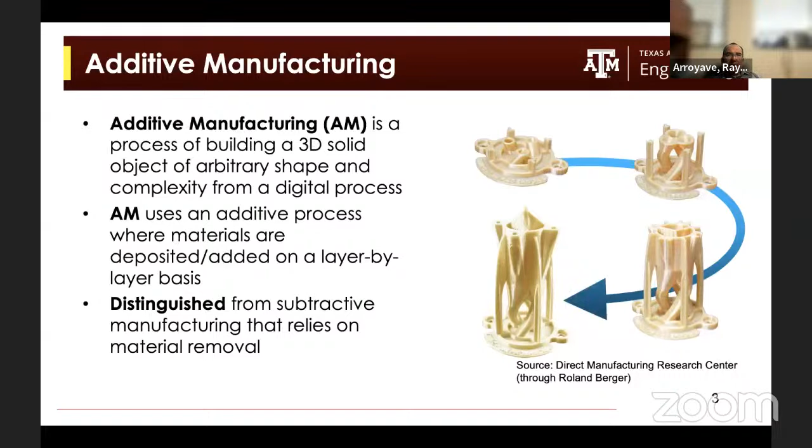This distinguishing aspect of additive manufacturing has become incredibly important in many industries. It started in the 90s, and I remember faculty at MIT, like Professor Sachs, and even my advisor Thomas Eagar, were working on additive manufacturing as a rapid prototyping technology back then. However, in the past decade particularly, it has gained increasing industry relevance and been deployed in a wide range of applications. It's not going to be the only manufacturing technique, but in some applications it may likely be the dominant manufacturing approach in the near future, or now.

Here I'm taking a picture from Roland Berger's report, looking at different types of industries and the manufacturing readiness level scale when it comes to being amenable for additive manufacturing. It turns out that dental applications have all kinds of additive manufacturing technologies. Tooling is important, aerospace, and so on.

It tends to be that additive manufacturing is more economically feasible and attractive whenever the part you're making is both geometrically complex, so you cannot manufacture it any other way, and you're actually making things that have high value. So in any industry where you have a high value proposition and the thing you're trying to manufacture is complex, additive manufacturing may play a role.

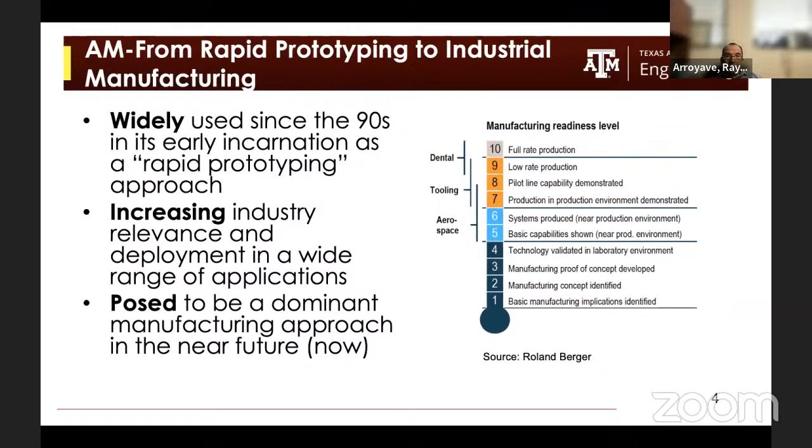Now, there are many benefits to additive manufacturing. For example, because you're building materials or components on a layer-by-layer basis, you have considerable freedom in terms of the geometry and topology of the part you're making. So it gives freedom to do really optimal design for whatever application you have in mind.

Because you're 3D printing complex geometries, you can consolidate a lot of parts. There are examples already deployed in industry where a part that used to consist of 15, 20 components is turned into a single part through additive manufacturing. This has a lot of benefit because your inventories become simpler, your supply chain becomes easier to manage, and the provenance and verification of your components is easier to handle.

Another advantage is the fact that you can customize your fabrication. After all, you're designing stuff and you can print components and parts on an individual basis. That means you can design components specifically for the application you have in mind, and basically mass customize your fabrication.

Another advantage of additive manufacturing is that you can significantly save the amount of material you need to begin with to fabricate a part. This is important because in subtractive manufacturing, we start with a block of material and sculpt away material to get the shape we want. Here, we're building the shape from the ground up.

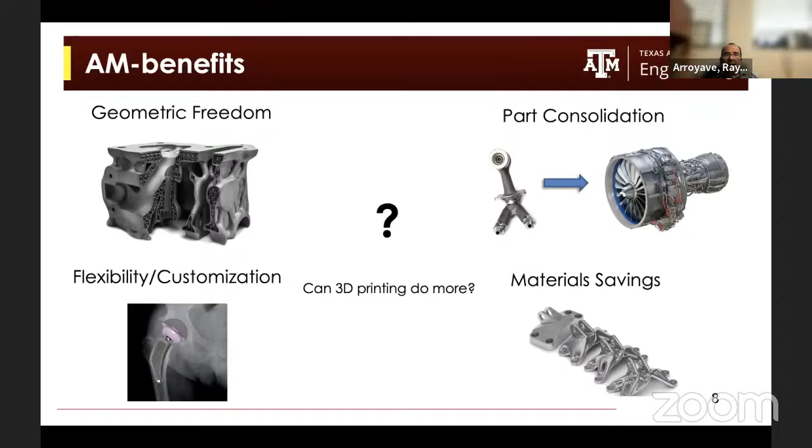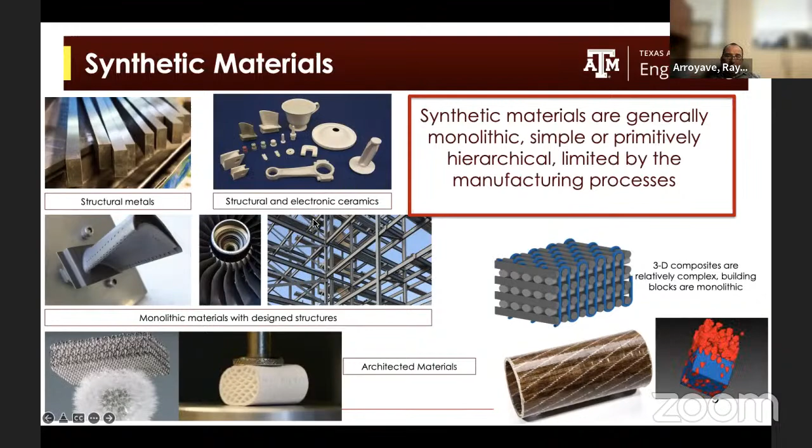Now, the question here is: can 3D printing do more than just allow you to create geometrically complex, consolidated, customized, mass-efficient parts? To take some inspiration, if we look at synthetic materials, they tend to be monolithic, simple, primitively hierarchical, and extremely limited by the manufacturing process. So the stock used to fabricate complex parts has to be very simple in geometry, composition is uniform, and there's not a lot of freedom in terms of the design you can use.

Natural materials, on the other hand, tend to be very complex. You have hierarchical structures, and more importantly, in natural materials you actually have location specificity. What does that mean? Every location of a biological structure may actually have specific hierarchical arrangements that are tailored for a particular function.

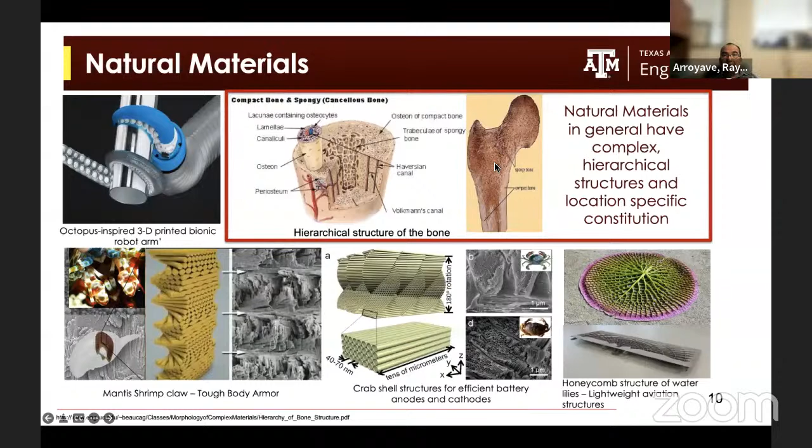So every component in a biological material may have different microstructure and different chemical makeup, which gives them different properties that are especially adapted for the particular function that object has to have. For example, in the case of bone, different parts of the bone are going to have different stiffness, strength, and mechanical properties depending on the loading conditions and function that bone has in an animal body.

So the current value proposition of additive manufacturing is based on the fact that you can build highly customizable and complex shapes that make the design of the component more efficient. And yet, we believe that the underlying 3D printing technologies can be leveraged to achieve much more.

So the question here is, how can we leverage the fact that we can build materials on a layer by layer, and in some cases voxel by voxel basis, and use this flexibility of fabricating materials from the bottom up to enable things that otherwise would be absolutely impossible to do with traditional technologies?

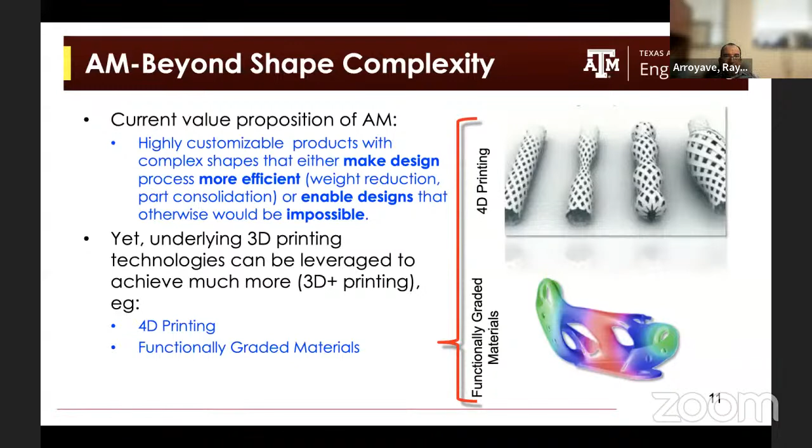In this particular talk, I'm going to focus on 4D printing and functionally graded materials. I'll start with 4D printing. I believe the first example of 4D printing started at MIT about 10 years ago. 4D printing denotes additively manufactured structures that can change their form, property, or function with time under stimuli, which could be light, a change in pH, temperature, magnetic field, or stress. 4D printing expands the potential of 3D printing by providing more degrees of freedom to engineering design.

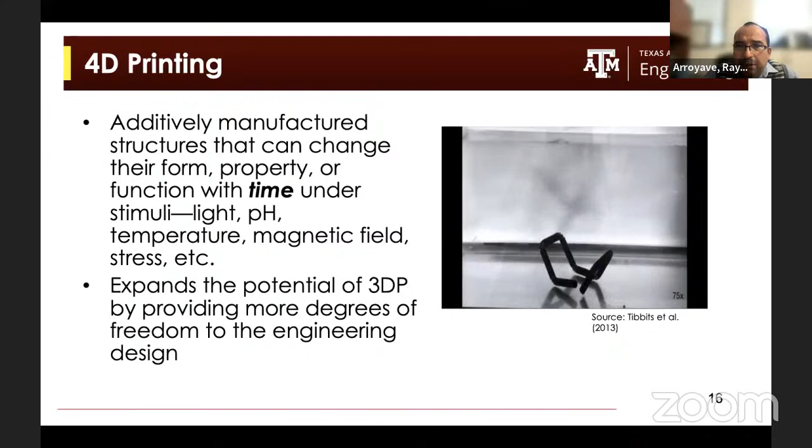Here's an example that I believe came out of MIT: a polymer engineered so that different elements of this polymer component responded differently to the local chemical environment. I don't know if in this case it was a pH-responsive material, but because different components were engineered with different sensitivity to the surrounding chemical environment, you could enable, for example, self-assembly or time-dependent actuation or motion in the part they were making.

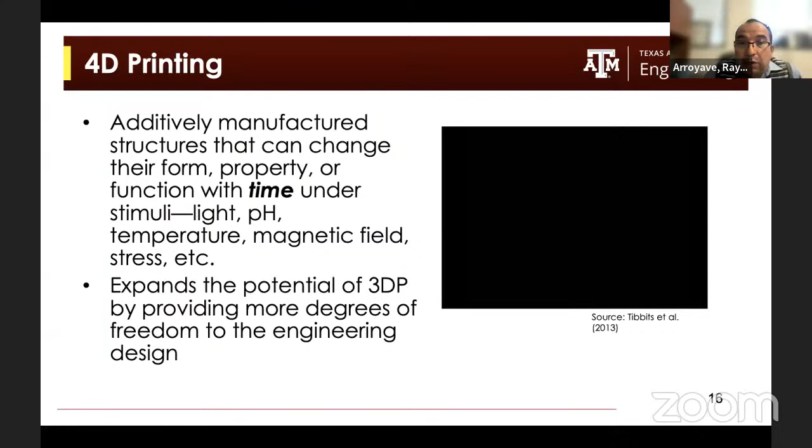So this was in polymers. And actually, to date, 4D printing has mostly exploited stimulus-responsive soft materials. 4D printing is extremely advanced in the case of soft materials, and they've been used to demonstrate a number of applications important for a wide range of industries. There are many types of soft stimulus-responsive materials that have different mechanisms by which they respond over time under the presence of a stimulus.

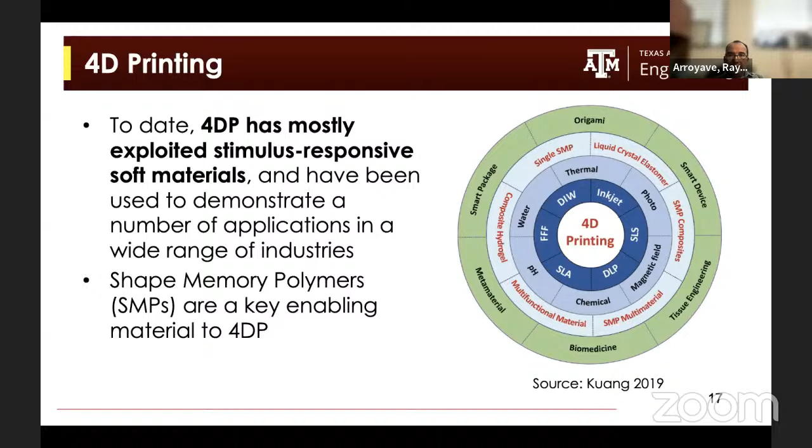Now the question here is, what about metals? It turns out that shape memory polymers have a counterpart that is probably older than shape memory polymers: shape memory alloys. These materials are metallic systems capable of undergoing very large recoverable strain as a result of reversible martensitic transformations.

So you have martensite at low temperatures, for example, and as you increase temperature, there is a rapid martensitic-style transformation that takes this crystal structure and transforms it into a higher symmetry structure. In shape memory alloys, this martensitic transformation is actually reversible and can be triggered by stress, temperature, magnetic field, or a combination of these different stimuli. So shape memory alloys can undergo these reversible phase transformations.

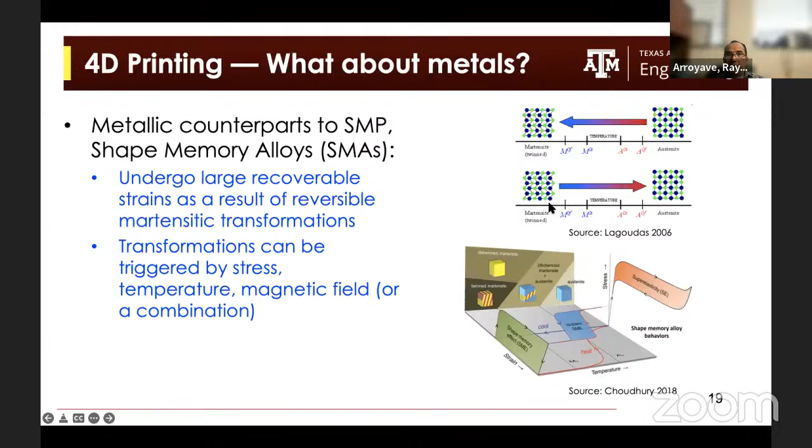It turns out that shape memory alloys have some advantages relative to shape memory polymers, in the sense that they can withstand loads that are orders of magnitude more than what a soft shape memory polymer can withstand. So you're talking about 200, 300, even higher loads, while undergoing these reversible phase transitions. And they enable applications that are not possible with soft materials.

For example, if you want actuation at high temperatures, you're probably not going to be able to do it with shape memory polymers. There are examples of shape memory alloys, including alloys discovered at Texas A&M by Professor Karaman, that can undergo these reversible phase transformations at temperatures as high as 800 degrees Celsius. So clearly, as soon as you reach temperatures of 200 and above, having to carry loads of hundreds of megapascals, these are operating conditions that soft shape memory polymers cannot sustain.

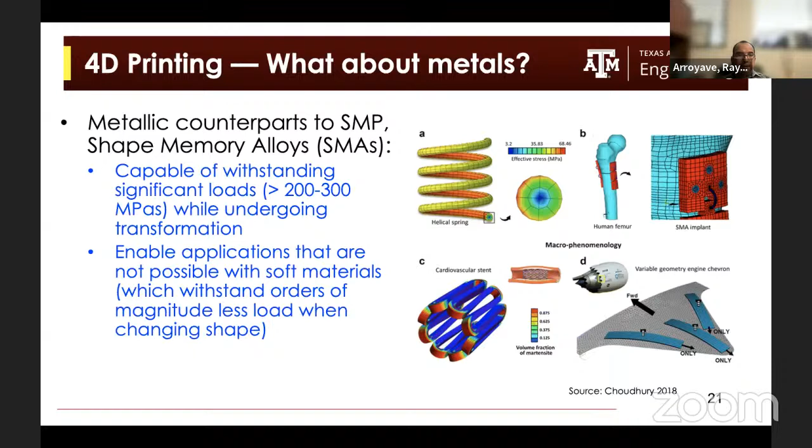So there is clearly an opportunity to try to do something related to 4D printing with shape memory alloys. Now, one interesting aspect of shape memory alloys is that they are extremely sensitive to minute changes in the chemistry and the microstructure.

Here, for example, I have a plot for the transformation behavior—basically the transformation temperature at which this reversible transformation is triggered for nickel titanium, as a function of the amount of nickel. If you look at this change, you can shift the transformation temperature by almost 100 degrees Kelvin by changing the chemistry by just less than 1 atomic percent.

More importantly, in addition to this, we have discovered in collaboration with Professor Karaman that if you subject some of these shape memory alloys to heat treatments, you can dramatically change the transformation behavior by controlling the microstructure of the material. So these materials are incredibly sensitive to chemistry and microstructure.

So a key insight that we had in our group, about 4 years ago, was that if we could locally change the chemistry and/or microstructure of these materials, we could achieve location-specific behavior. And this could be enabled through the local control of the additive manufacturing process conditions.

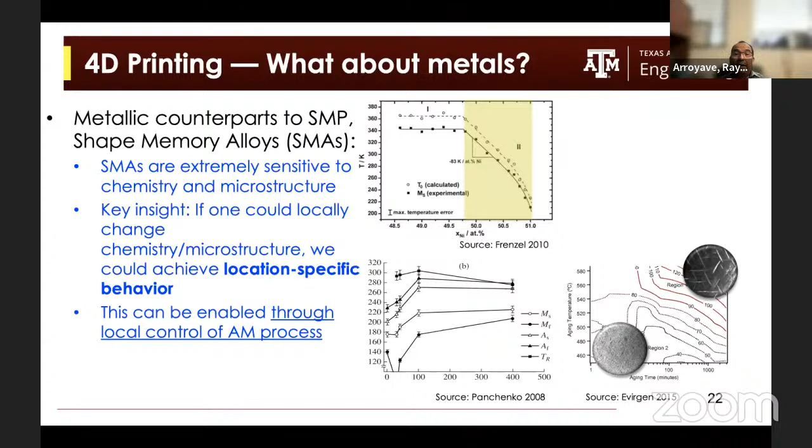So the idea here is, if we know that these materials are highly sensitive to chemistry and microstructure, can we tailor the chemistry and microstructure of a material that has a uniform feedstock composition, just by locally controlling the process conditions? So we're actually proposing here 4D plus printing, where we have the traditional 4D printing characteristics of being able to fabricate things that respond in time.

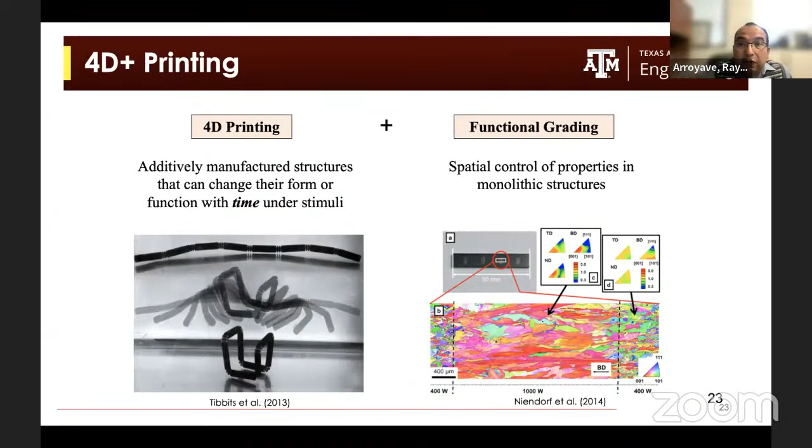But the idea here is that we actually want to locally change the composition, so we control this actuation in time and also in space. Can we actually print different locations of the part with different processing conditions? So every region of the part has different chemistry, and therefore different transformation behavior when we apply a particular type of stimulus, okay?

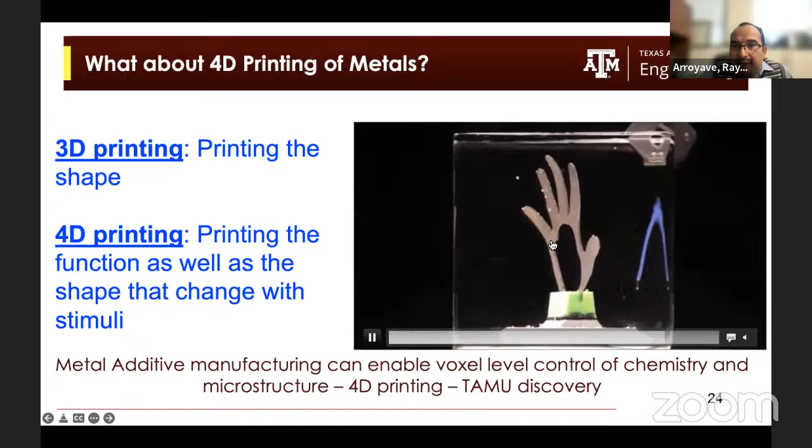This is not water, this is actually glycerin. It turns out that if we try to do this with water, we will see a lot of boiling and a lot of bubbles, so we wouldn't get a nice picture. So we basically had to figure out what type of liquid to use, and we settled on glycerin to try to visualize this actuation response with minimal visual disruption. And of course, this is an accelerated video.

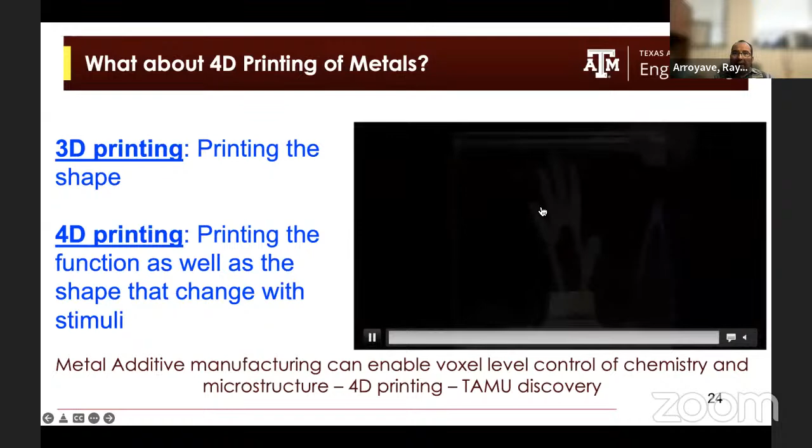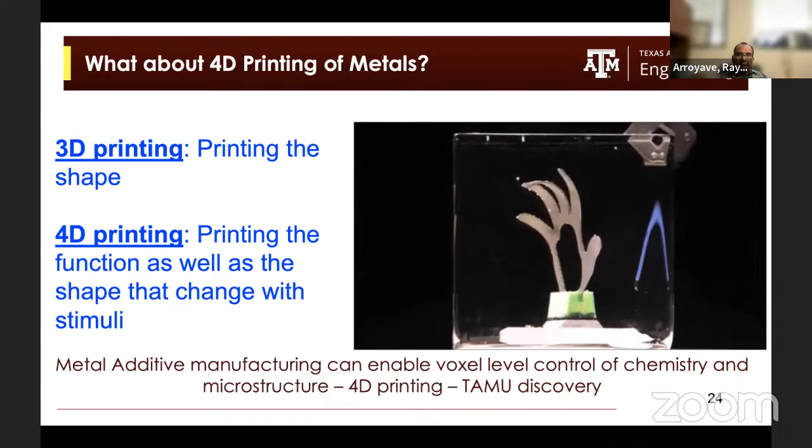It turns out that the actuation, at least in this case, was not really fast. So this is not like a scary robotic hand, it's actually kind of slow. But here we are demonstrating that we could potentially control, on a location-by-location basis, the response of these materials.

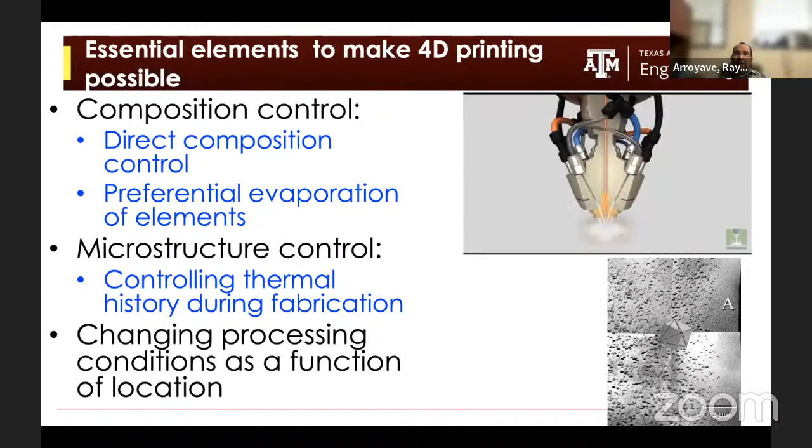So essential elements to make 4D printing possible in the context of additive manufacturing is through composition control. Can we actually directly deposit feedstock that has different chemistries? There are 3D printing technologies, for example, that allow you to do multi-material printing. I'm going to talk about that in the second half of my talk.

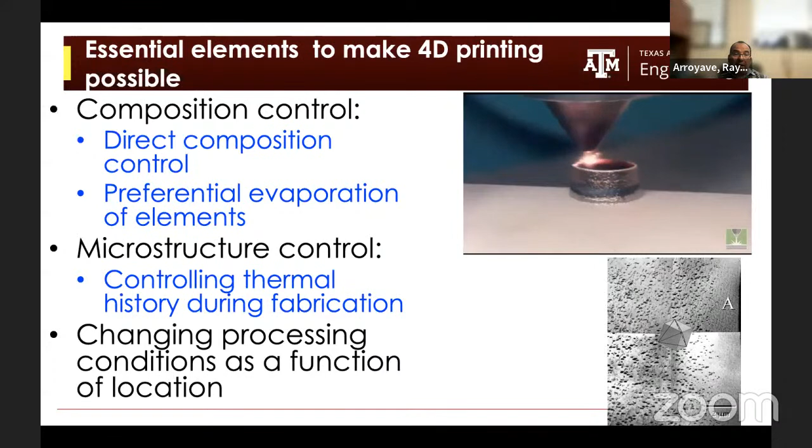Or, in the case of a material like a shape memory alloy that is extremely sensitive to chemistry changes, could we actually exploit the fact that different elements in the alloy have very different vapor pressures, to then enable the preferential evaporation of elements in such a way that we could locally control the chemistry?

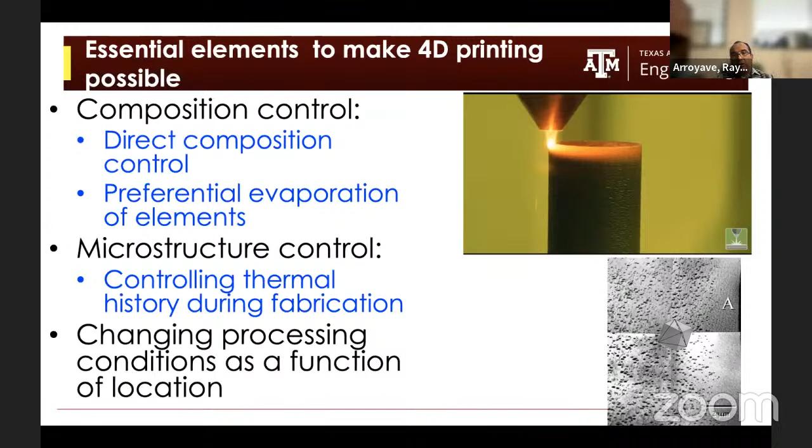And of course, in addition to composition control, we could do microstructure control, and this could be enabled, for example, by controlling the thermal history of the material during fabrication. So the key idea is to change processing conditions as a function of location in the part.

By the way, we have demonstrated what is possible, but we haven't yet developed a whole framework that allows us to solve the inverse problem. It turns out the inverse problem is very hard. We have just tinkered with the material and process conditions to demonstrate that location specificity is possible in the context of 3D printing of shape memory alloys.

But if you think about it, in order to enable this in an algorithmic way, you actually have to combine topology optimization, model process and structure property relationships in additive manufacturing, optimize the process, validate and verify, and make sure your optimization is robust against changes in the local cooling conditions when you fabricate. So right now I'm just going to talk about some steps we have taken in this direction, but we don't have yet a complete story to tell.

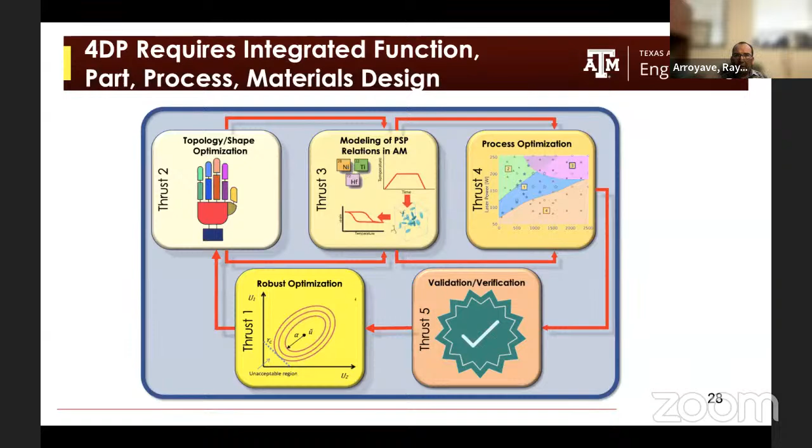On the process optimization side, we have used a combination of physics-based models, machine learning, and experiments to try to come up with a framework that enables us to find optimal regions in the processing space that lead to parts with low porosity. The first thing is, if you're trying to fabricate something with additive manufacturing, the least you can do is make sure that whatever you print doesn't have macroscopic porosity that would ultimately compromise the performance of the part. Pores lead to failure, such as fatigue, etc.

So the first thing we do is say, well, we have this large processing space, we can change the power and the scan speed of the laser. Can we detect what regions in the processing space lead to optimal printing without defects? The idea is we do some simulations, compute an initial printability map, do some single track experiments, calibrate the models to correct for missing physics, revise the printability map, and then in the good region, where we do not expect microscopic defects, we print bulk samples.

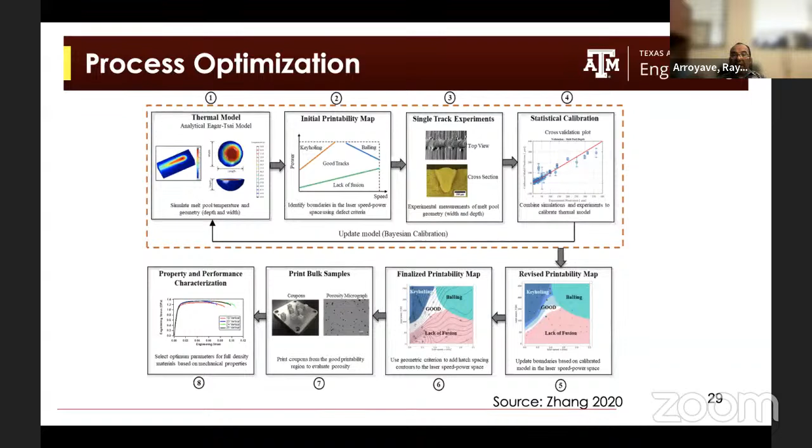What we have found is that as long as we print things in regions not conducive to these microscopic defects, the properties we get out of these materials tend to be very uniform. And that makes sense, right? We want the material to not be limited by the presence of microscopic defects such as porosity.

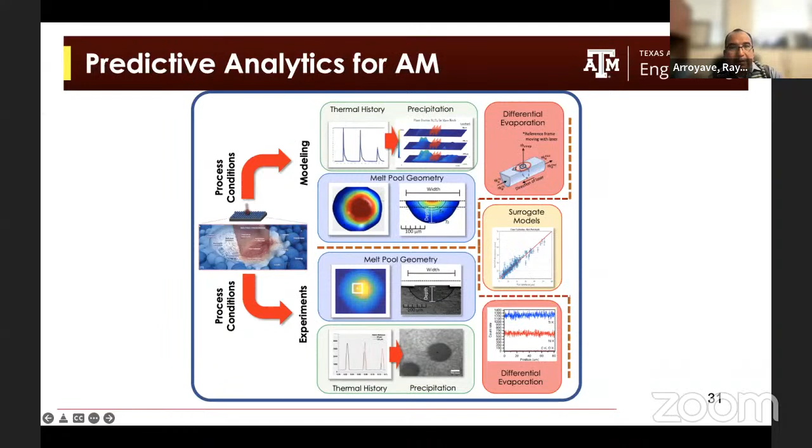Now that we know how to print the material without defects, the question is: can we actually use computational models to predict the effect of local thermal history on the chemistry and/or microstructure of the material? The idea is, can we build physics-based models, and couple them with experimental twins to build robust models that enable prediction of the change in chemistry as a function of changes in process conditions?

So we have one first step in this direction, and actually one student who was a lab mate of Kubra for a few years, Dr. Milad Ranayefar, just defended his thesis a couple of weeks ago.

He developed a modeling framework where he was able to connect a thermal model, initially developed by Air Force Research Lab and calibrated against experiments, to a model that predicted the differential evaporation of nickel in nickel titanium shape memory alloys. So we would basically predict how much nickel loss existed in a melt pool. Then he built a multi-layer model that integrated these single track predictions and took into account the mixing of chemistries as you build successive layers. He was able to demonstrate that, at the end, he had a computational framework that was in very good agreement with experiments.

Here is a prediction comparing the experimental nickel loss, measured via the transformation temperature of these shape memory alloys, with computational predictions. The agreement of 0.15 atomic percent error is actually smaller than the resolution of chemical analytical techniques such as EDS or WDS. So we're able to build predictive models more precise than some analytical techniques for measuring the local composition of materials as they are printed.

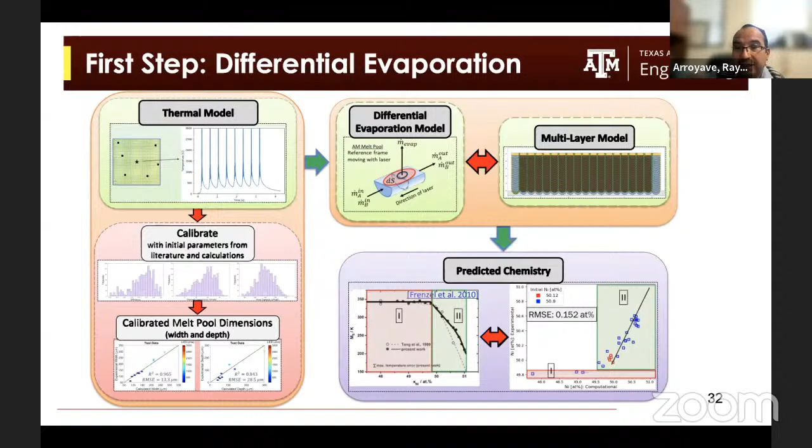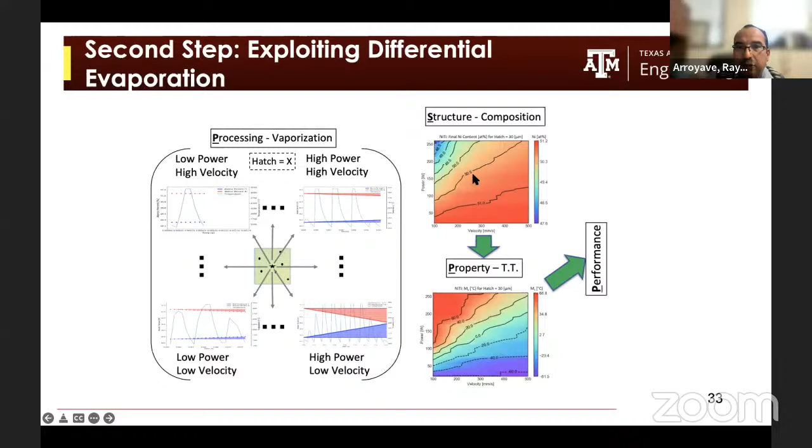Once we build this model, we can create process maps that tell you how the nickel content and transformation temperature will change as a function of where you are in the power-scan speed space. Once we have this forward model, the idea is to start thinking about how we invert these forward models to begin closed-loop design.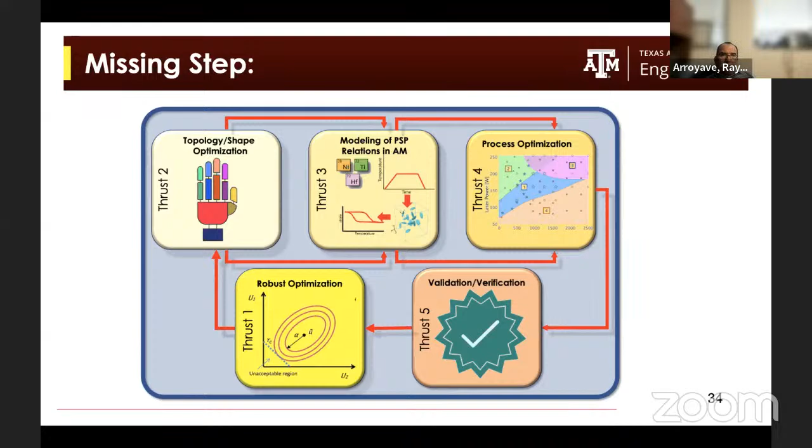This is objective-based algorithmic design for 4D printing. We're not quite there yet—we're starting to work on the inverse problem, but don't have a lot of results yet. Milad has some preliminary work that's exciting, but this is a very interdisciplinary project requiring more people than we currently have. Still, I think there's interesting future potential for 4D printing.

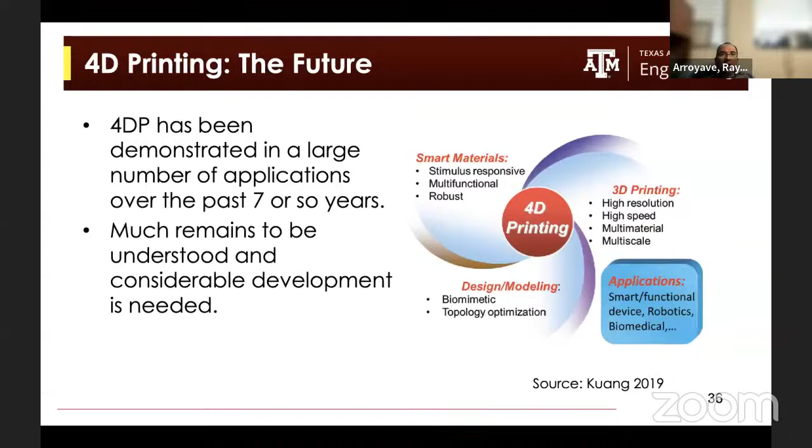4D printing has clearly been demonstrated as a very attractive area in the case of soft responsive materials. We think there's a lot of really cool stuff that can be done in the context of metallic responsive materials. This is an area that, in collaboration with Professor Karaman and Elwany, my group wants to explore in the future.

Now I'm going to switch gears and talk about another example of going beyond 3D printing: functionally graded materials.

Here, what we're trying to do is expand the design palette. Compositionally graded alloys are promising, particularly because they enable new possibilities in part design. Instead of doing topology optimization on a part to minimize total weight, imagine if you could print different properties in different locations of the part, so every location could be optimally designed for a particular performance characteristic.

For example, if you're 3D printing a turbine blade, maybe you want the surface to be oxidation resistant, but maximize creep strength or high-temperature strength in the core. In some cases you can't have an oxidation-resistant alloy that's also creep resistant, ductile, and has good high-temperature properties all in the same monolithic material—because to do that you'd have to over-design and create alloys that are good at everything, which isn't always attractive.

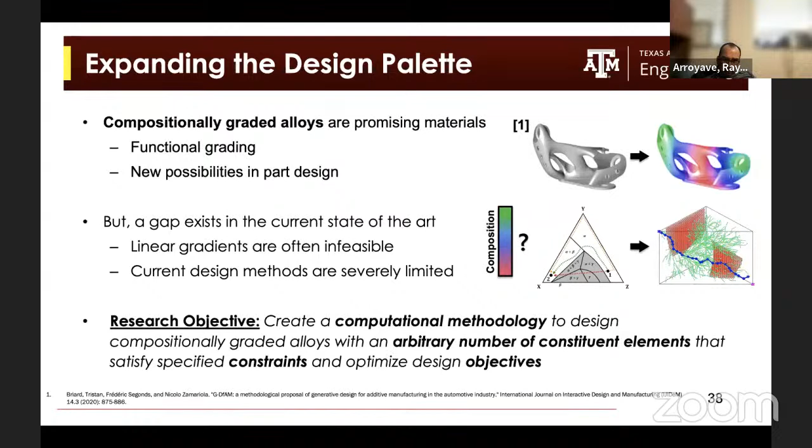So the idea is: can we enable more flexible designs using the capabilities of 3D printing, particularly by exploiting multi-material printing to locally change the chemistry, microstructure, and properties of the part to locally optimize performance for practical applications? Even though this is possible, there are gaps—linear gradients are often infeasible, which I'll explain shortly, and we lack design frameworks that take advantage of these capabilities systematically. Our research objective is to create a computational methodology to design compositionally graded alloys with an arbitrary number of constituent elements that satisfy specific constraints while optimizing design objectives.

So how do we do this in practice? There are many techniques for multi-material printing, but in our work we've used directed energy deposition. Here you print material layer by layer, but unlike typical additive manufacturing, we deposit the material and energy at the same time—shooting a beam of powder and melting it on the fly, hoping it sticks to the substrate so we can build a complex three-dimensional shape layer by layer. There are many possible engineering applications, and this can enable multi-material design.

I will not touch this topic of multi-material design because I don't have enough time, but in principle, what compositionally graded alloys can enable is the local optimal design of material compositions in different parts or regions of the part that we're trying to print. And then using the techniques I'm going to show in a minute, we can stitch together these multi-materials in such a way that they form a monolithic part.

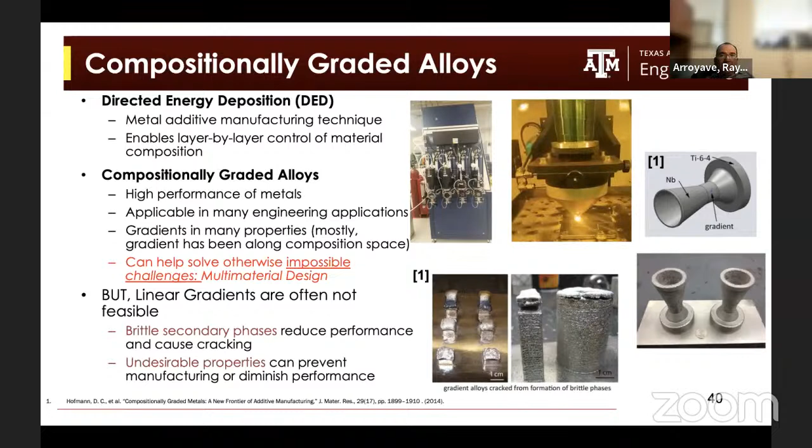Unfortunately, when you try to do this compositional grading with linear gradients that just connect one start composition to an end composition, it turns out that brittle phases appear, and oftentimes linear gradients lead to undesirable properties that can compromise the manufacturing of the part and diminish their performance.

So it turns out that compositionally graded alloys are challenging to print. There are many examples in the literature where people have tried to print linear gradients from all kinds of base alloys, from steel to Inconel, from steel to titanium 6-4, and so on. It turns out that 90% of the time, these linear paths fail because you form brittle phases that end up compromising the mechanical integrity of the part.

They can also, if you do a linear path, create property discontinuities, for example in thermal expansion coefficient, that would compromise the mechanical performance of the part because you can generate internal stresses or other undesirable conditions inside the part that would compromise its performance.

So there have been some attempts to use computational tools to design these alloys. Most of the time what people have done is try to predict ternary phase diagrams and then find, by human intuition, a path that may run around obstacles. But the problem is that when people use these approaches, they are extremely difficult to scale and very difficult to deploy in the case of multi-component materials.

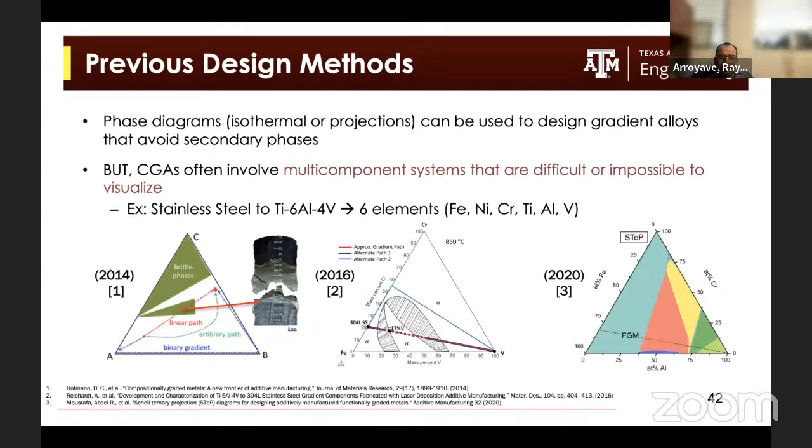Why? Because humans are not built to see things in more than 3 dimensions. So when you have many more dimensions in your design problem, it is extremely difficult to come up with robust composition paths. So what we have done in our group, in collaboration with Professor Malak, is to look at the gradient design problem as that of motion planning.

We're actually trying to say, well, can we formulate the design of a gradient alloy as a path planning problem? For decades, a lot of engineers in a lot of fields have tried to develop algorithms that enable the design or planning of a path. These types of techniques have been used in many problems, from protein folding to mapping trajectories in autonomous vehicles and so on.

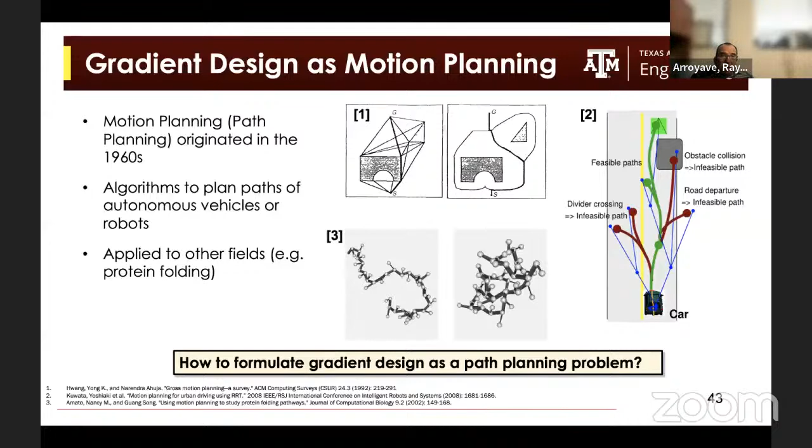So the question we have is, could we actually leverage these path planning technologies and transform them in such a way that we can use gradient compositional design in an algorithmic way?

So basically what we do is try to minimize a particular function, and this function could be a property, or the length of the path, or some other quantity, subject to the fact that you start and end at a particular point in the chemical space, and subject to constraints related to avoiding regions in the chemical space that are undesirable, maybe because some phases form that are undesirable, or because some regions have a low melting point or some other undesirable characteristic.

So can we actually map a trajectory in an n-dimensional space, maximizing or minimizing a quantity while avoiding obstacles?

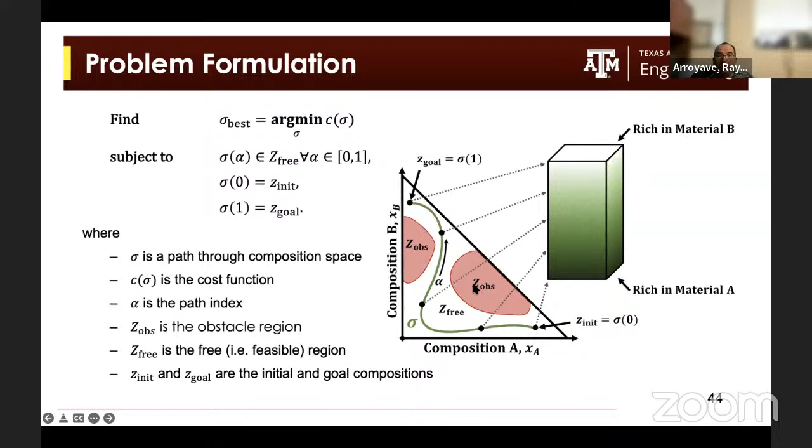So this is the methodology. We use computational tools, computational thermodynamic tools, to map the obstacle space. Then we use machine learning methods to classify the regions in the space that are unfeasible. With these classifiers, we build an obstacle model, and then we present this obstacle model to a path planning algorithm, such as RRT*, that enables us to connect points in chemical space in such a way that we avoid obstacles, and at the same time minimize or maximize a particular property.

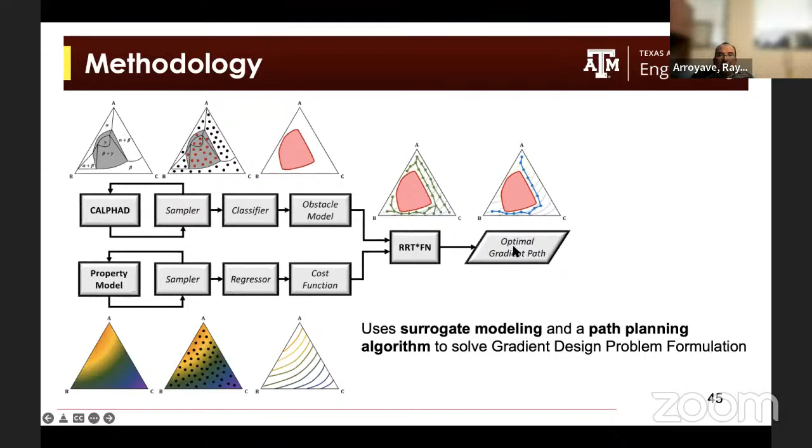And of course, in addition to the phase characteristics, if we have a property model, we could build arbitrarily complex cost functions into the path planning algorithm in order to obtain some measure of optimality in the gradient that we're fabricating.

So we have some experimental results. This is an example that was published a few years ago, where we tried a naive linear path between a particular alloy and stainless steel.

And of course, what we found when we tried this path is that the sigma phase, which is really bad in steel alloys, is prevalent for much of the path. And when you try to print this naive path, you actually get cracks because of the formation of these very brittle phases.

On the other hand, when we plan the path, this is an early example, we're way better, and we can actually match almost perfectly the planned trajectory. But this was one of the earliest examples where we design a path and then try to approximate it with our multi-material printer.

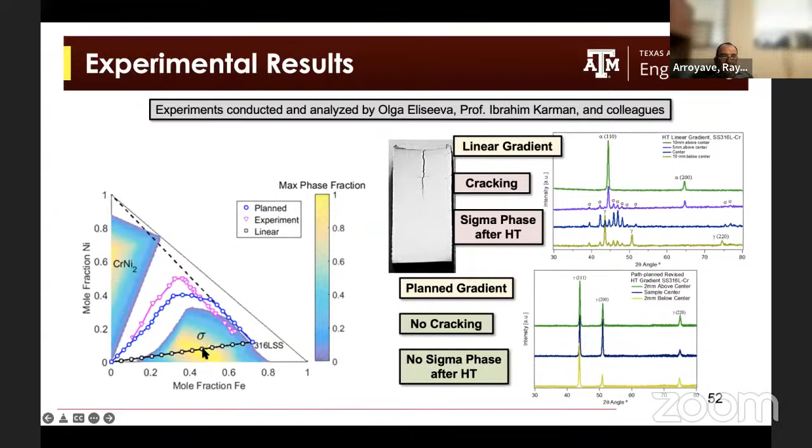We were able to see a compositionally graded path that had no cracking, and we didn't observe any sigma phase even after heat treatment under temperature conditions where the sigma phase would be observed if you actually had a composition in this region.

So we have demonstrated that we're able to optimize a path by avoiding obstacles. But what about functionally grading? What we have presented is just compositionally grading, but functionally grading is about grading not the composition, but actually a property or a function. And this has many applications.

For example, large discontinuities in the thermal expansion coefficient could lead to significant stress concentrations. So a property profile that is smooth may actually minimize these changes, and therefore the stresses that are built up when the material is subject to temperature changes.

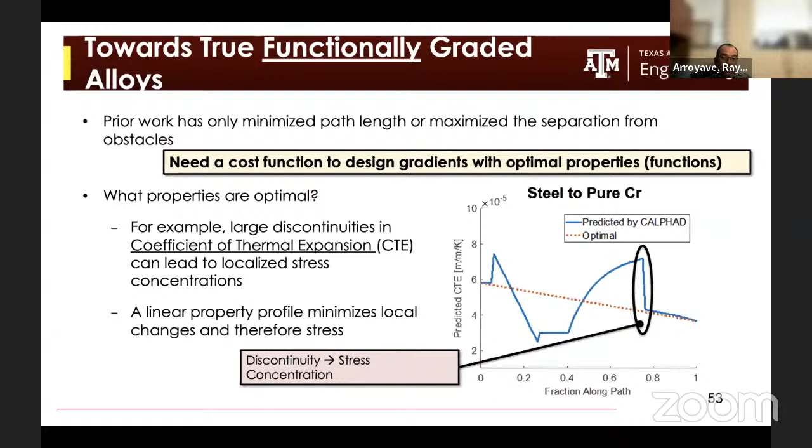And that is just one example. We could actually grade on purpose other types of properties, such as strength, or elastic modulus, or other types of properties for different applications.

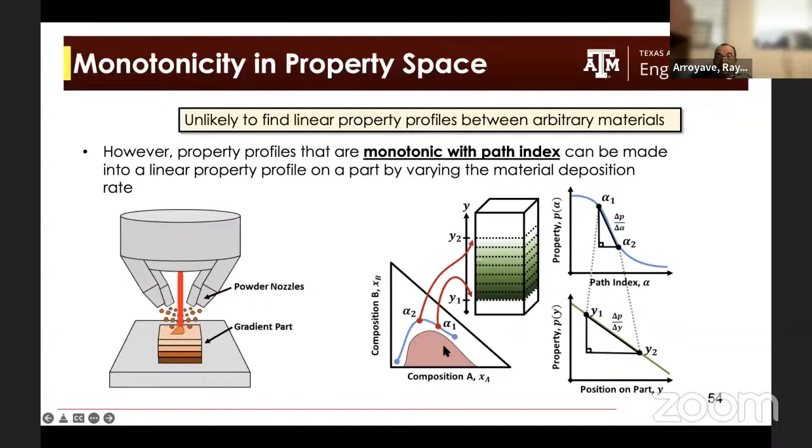What we know is that it is unlikely to find these linear property profiles between arbitrary compositions. However, one thing that my former student Tanner Kirk discovered was that if we ensure that the path in the composition space was monotonic in the property space, that is, if we ensure that the trajectory changed the properties only in one direction, so it always went down or up, we could then create any arbitrary linear or nonlinear profile of this property just by controlling the deposition rate.

So the idea here is we actually have to find a path that is monotonic. Then once we find the path that is monotonic, we can write any arbitrary property profile as long as it's bounded by the limits in the property between our start and end goal for the composition trajectory. So to make any gradient part with optimal properties and arbitrary property profiles, the only thing we need is to find a gradient path with this monotonicity behavior.

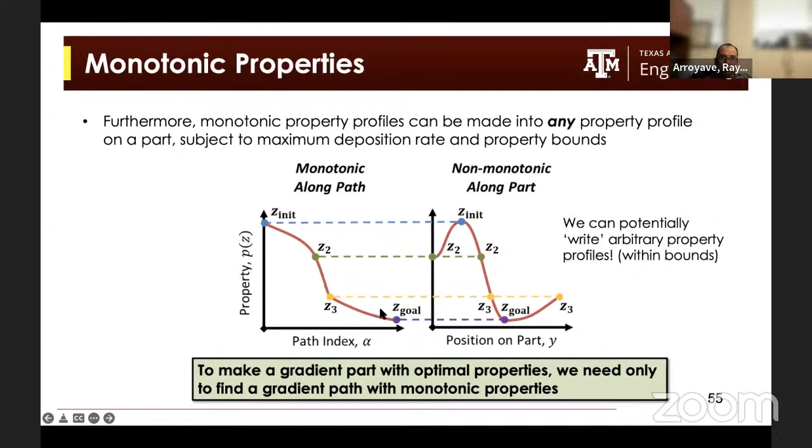So this is an example. We looked at the iron, cobalt, chromium system, and we tried to map a path that connected two different compositions. We found an optimization problem where we tried to minimize the length of this trajectory while ensuring that we didn't have a particular phase, that we avoided obstacles, and at the same time made sure that the path was monotonic in thermal expansion coefficient.

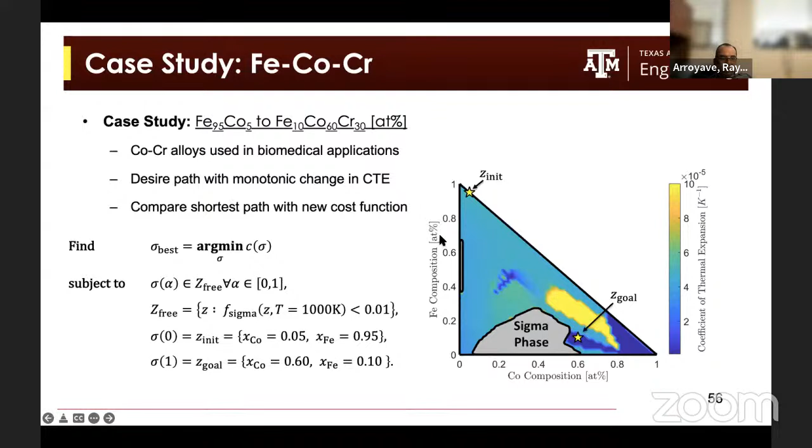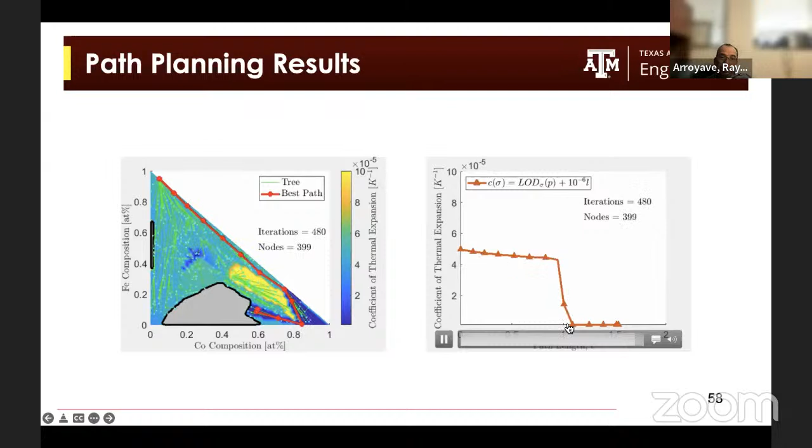When we apply the path planning and enforce the monotonicity constraint, we find that the algorithm is able to find a more complex and longer path, but in this case the property is monotonic. And if it's monotonic, that means that just by controlling the deposition rate, we can print any property profile we see fit. This is just an example comparing the monotonic and non-monotonic path, and clearly this path is likely to have fewer problems with thermal expansion stress buildup than the non-monotonic case.

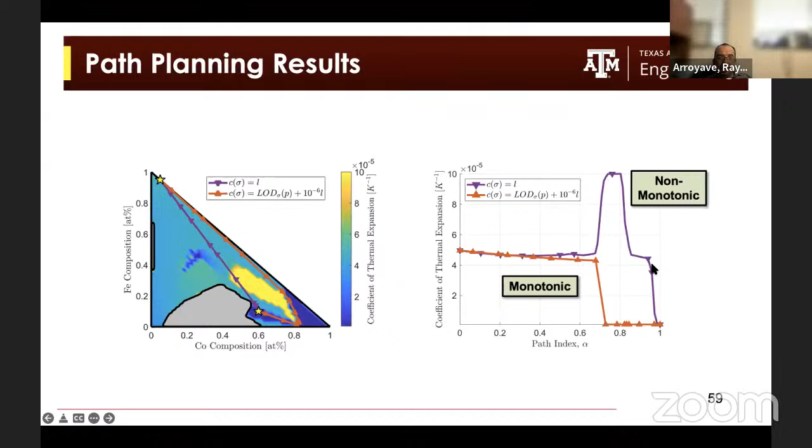So future work in this context of functionally grading: we have done compositionally grading, but if we're trying to print this, we have to map the processing space in such a way that we minimize the formation of microscopic defects. The idea is to combine composition path planning with process path planning so that we obtain not only optimal chemistries, but also optimal processing conditions at every material point, optimizing a particular property while avoiding undesirable obstacles, while ensuring that the composition path is printable.

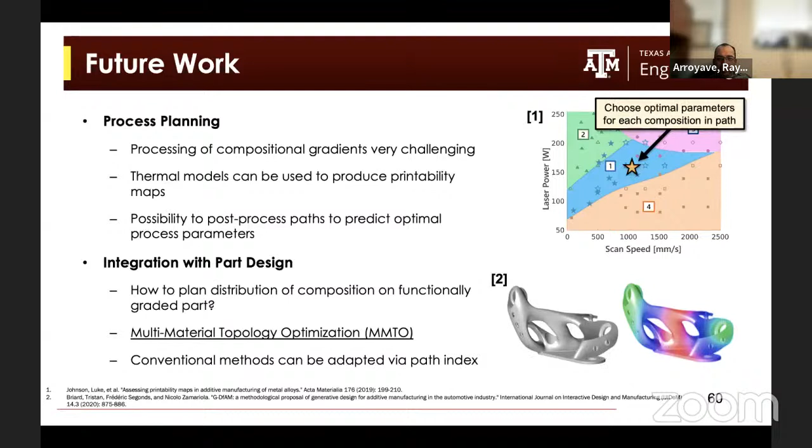And of course, the other thing that we want to do is integrate this with part design. So can we exploit technologies such as multi-material topology optimization in such a way that we can locally optimize the chemistry and properties of the part as we 3D print it? This is one of the future ideas we have for this research program.

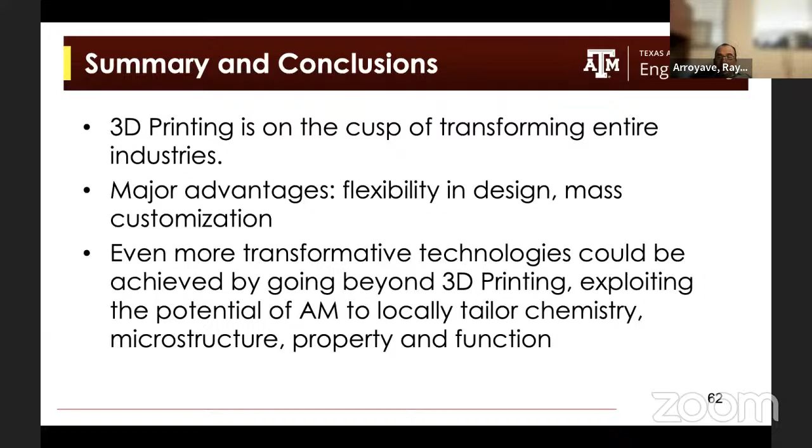Okay, now to conclude, I'm a bit longer than I expected. 3D printing is on the cusp of transforming entire industries. As we have seen in this talk, the major advantages are flexibility in design, mass customization, and more efficient utilization of materials. But we believe that even more transformative technologies could be achieved by going beyond 3D printing, exploiting the potential of additive manufacturing to locally tailor chemistry, microstructure, property, and function.

And with that, I would like to thank you for your attention, and I will be happy to entertain questions that you may have. Thank you.

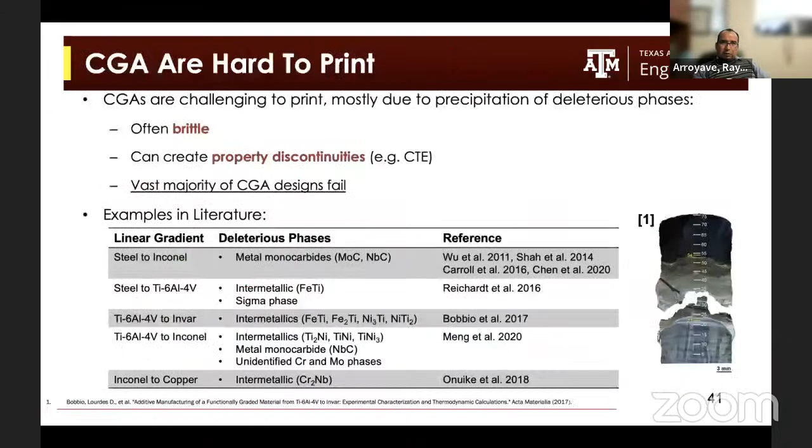But we haven't incorporated it yet in the road mapping idea. Actually, the road mapping idea is just an idea. We haven't even written a single paper. My student is working on the first paper where he demonstrates this idea, but we haven't done much yet. Okay, but yes, you're right.

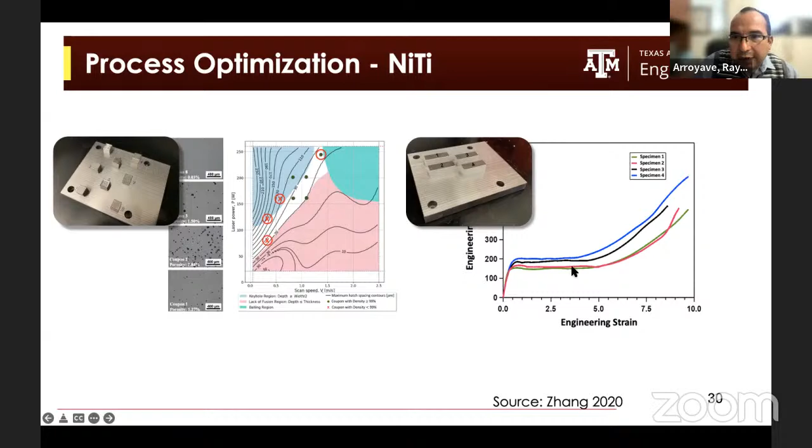Thanks so much, and I have actually one really quick more thing, Professor. Sure. As a heads up, when looking at those little density cube builds that you showed, I noticed you seem to have them oriented such that the recoater blade's going to hit parallel to some of the long faces of the specimens. If you rotate them a couple of degrees, it'll make it so you could potentially have less issues in terms of porosity, because the recoater blade, instead of hitting a whole lot of solid edges at the same time... the material tends to kind of edge.

Yeah, rotate them a couple degrees. Yeah, so thank you for that, Matt. I'll let... so I don't do the printing. My colleague Alaa Elwany has the printers. But yes, I will discuss that with him. Thank you for the advice. I will pass it on.